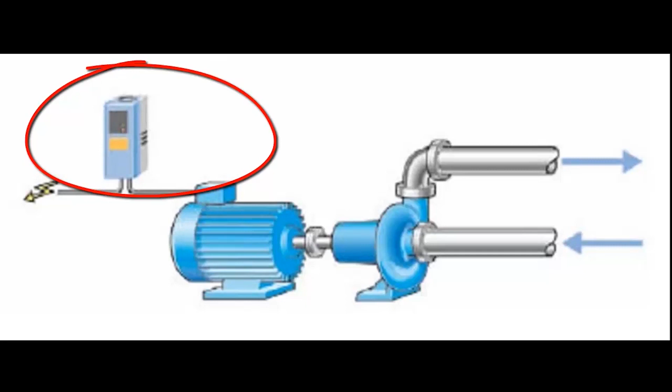Electrical engineers think reducing the speed of a pump will save energy. Mechanical engineers think restricting the flow will make a pump work harder. Neither of these things is true.

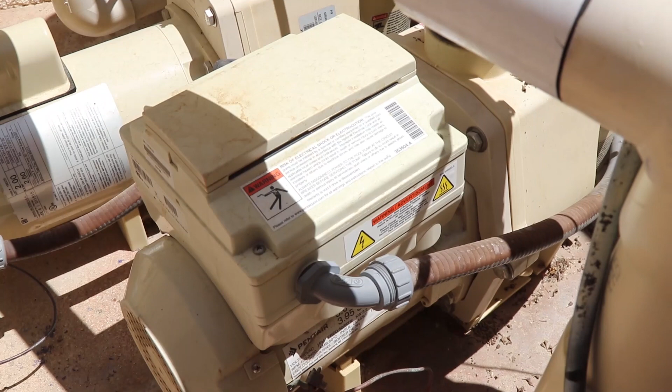Variable speed pool pumps have been available in the open market now for decades. They've risen in popularity in the pool industry in the last several years, being pushed by all the major manufacturers as well as utility companies. They're claiming massive cost savings, reduction in energy usage, all for a reduced price. They're offering massive rebates, $1,000 and more, in order to push this product on consumers and see more of this out in the field.

What I have seen is a rash of green pools, unhealthy looking water, all as a result of variable speed pool pumps running at a lower RPM, which equals reduced circulation and water filtration. I have been of the opinion now for a long time that variable speed pool pumps are not the correct application for a pool circulation pump.

I personally run my variable speed pool pumps out in the field just like a single speed pump. That means I dial it all the way up to full speed, 3,450 RPM, and I will typically run it for a full run cycle, 6 to 8 hours per day while the sun is shining on the water.

Now, what they are trying to get us to believe is that by operating a pump at a lower speed for a considerably longer period of time, that is now translating into the same filtration and water turnover, however, at a reduced cost and energy consumption.

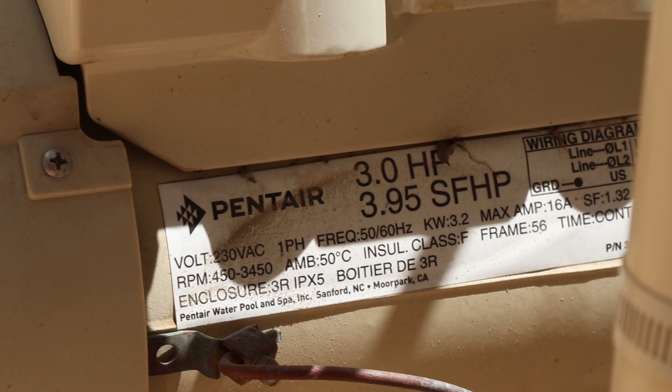Now, to many of my contractor friends and some electrical engineer friends of mine, this all sounds very fishy. These variable speed pool pumps are outfitted with a huge motor, a 3 horsepower motor. So a 3 horsepower motor being run at a lower speed over an extended period of time, in my head, translates to the same or more energy consumption.

Now, you take this back to the manufacturers and the utility companies, and you can see why they might be really pushing this product on us, telling us that it's saving money. Why? Because it's selling more product for the pool manufacturers, and it's selling more energy for the utility companies. There's $27 billion worth of variable speed drives sold every year.

For example, if they wanted this to truly be an energy saver, why did they not build these pumps with a 1 horse motor or a 3/4 horse motor? Yeah, that was exactly what they did with the pool industry. They outfitted these variable speed pumps with the highest available horsepower motor, a 3 horsepower motor. And if they were interested in the electrical savings, why didn't they not outfit them with a 1 horse or 1.5 horse? They went straight to the 3 horsepower because that's going to gobble up the maximum amount of electricity.

Well, not so much that, but you have to oversize a pump with a VFD because of the affinity law. The second part of the affinity law says you lose head by the square of the speed. So a flat curve, centrifugal, single impeller pump like a pool pump, you can't slow it down but about 5%, or you don't have the 30 pounds of pressure you need for the filter to work anymore.

So they start out with a 3 horse pump that will build 60 pounds of pressure, so they can slow it down about 20% and still have the 30 pounds of pressure you need. But if you start out with anywhere close to the right size pump, you can't slow it down or it won't do what it's supposed to do because it's running at its best efficiency point, giving you the most gallons per kilowatt that you can possibly get because you're not restricting it or slowing it down.

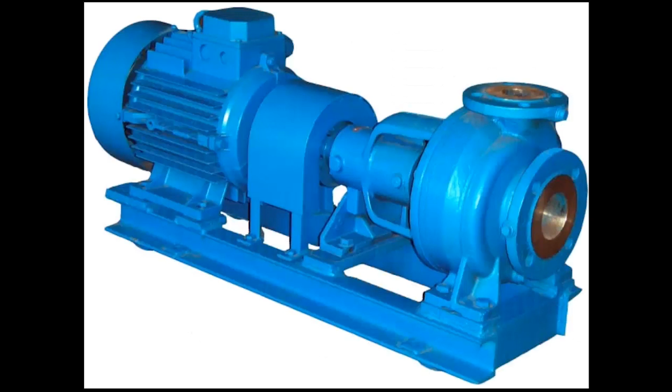The curved vane centrifugal pump, most commonly used today, was invented in 1851. Nothing uses less energy than a normal centrifugal pump running at full speed and operating at its best efficiency point. Many people have tried, but no one has been able to improve upon this centuries-old design. So nothing uses less energy than a single speed pump at its best efficiency point.

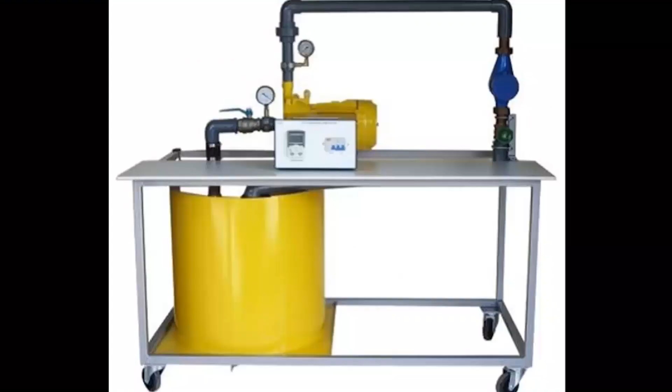So to understand a single speed pump and its best efficiency point, we also must understand how to read a pump curve. When a pump is built, it is put into a test pit and run through its paces. The performance of the pump is plotted from 0 to max flow rate. Connecting the dots produces a pump curve. Guesswork, fuzzy math, and personal opinions don't apply. The pump curve shows you exactly what the pump will do.

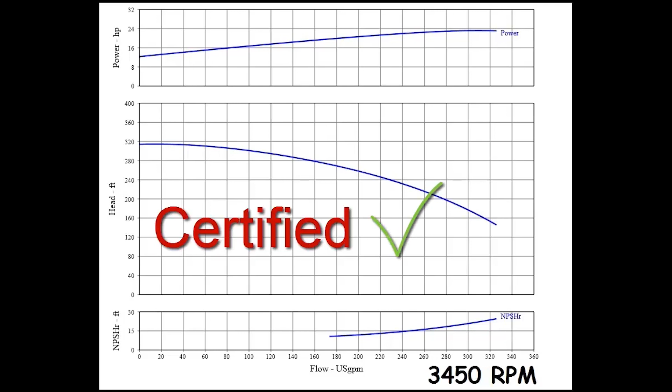Manufacturers can supply a certified test, and you can even witness the test on video. Guesswork, fuzzy math, and personal opinions do not apply. So this is what we call a hard science. A soft science is something that changes, like the weather. The weather is a soft science, okay.

What Cary Austin is presenting to us, this is a hard science. This cannot be argued. He's going to prove to us that variable speed pumps are a hoax, actually costing us more money over the lifetime of the pump.

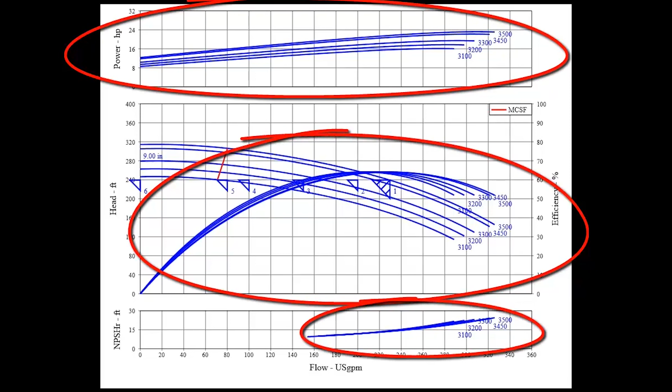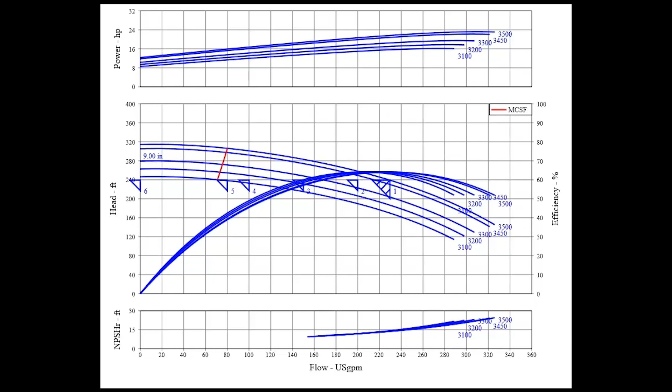Pump curves can show the horsepower, the efficiency, and the net positive suction head required. It can also have multiple performance curves depicting different impeller diameters and/or multiple pump speeds. Don't let any of this confuse you. Most pump companies' electronic catalog will let you X out the parts you don't need to see.

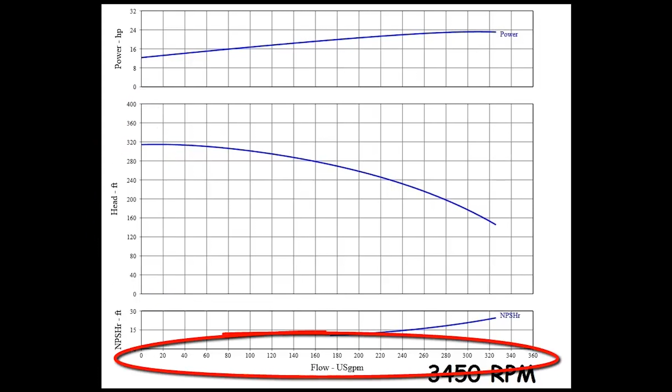In most cases, we only need to look at the performance and horsepower curve for a single speed pump with a set impeller diameter. Lift in feet of head is on the left side of the performance curve. The flow rate in gallons per minute is on the bottom of the performance curve. The horsepower curve shows how much energy is used at all different operating points.

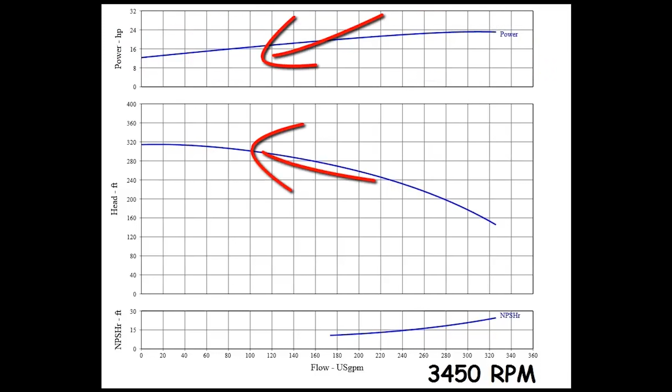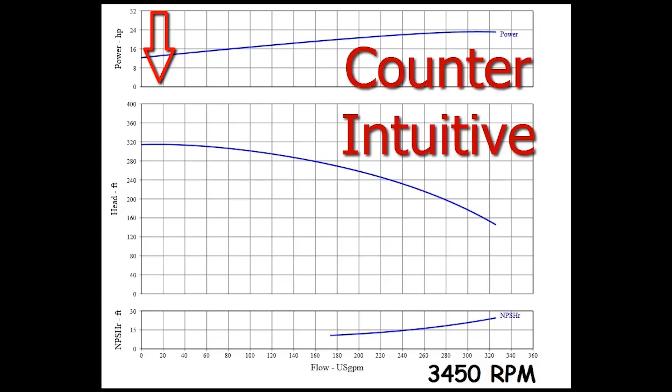Notice how the horsepower goes down as the lift or pressure goes up. It is completely counterintuitive, but restricting the flow of a pump reduces the horsepower or energy used and makes the pump work easier, not harder. As you can see, the horsepower for this pump naturally drops by 50%, from 24 horsepower at 300 gallons per minute to just 12 horsepower at 10 gallons per minute, without varying the speed of the pump.

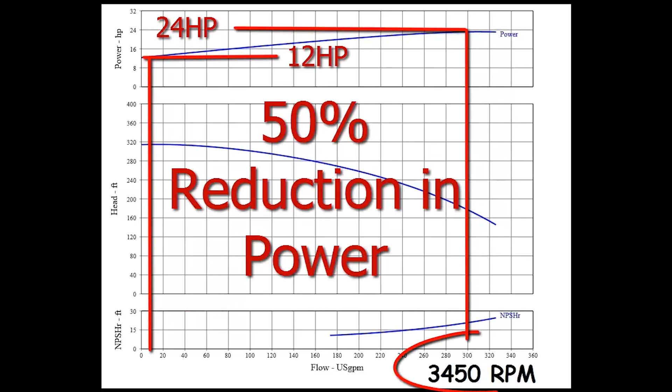Okay, this is very important. The horsepower organically reduces as the pressure on the pump increases, which means the electrical draw on the amps automatically reduces as the back pressure on the pump increases.

To a pump, 1 pound of pressure is the same as 2.31 feet of lift. So to get 50 psi at the faucets, the pump must produce 50 times 2.31, or 115 feet of lift. That 115 feet of lift for the pressure must be added to the actual pumping depth to water in the well.

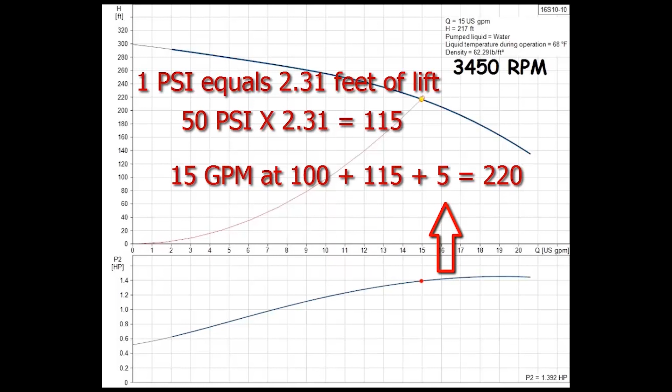If the pumping water level in the well is 100 feet and there is 5 feet of friction losses in the pipe, the pump must be able to produce 15 gallons per minute from 100 foot depth, plus 115 feet, which is the 50 pounds pressure needed, plus 5 foot of friction loss, for a total dynamic head of 220 feet. We look for a pump with a performance curve that intersects at 220 feet of head and 15 gallons per minute. This regular submersible pump, which spins at a constant 3450 RPM, fits the requirements.

So what Kerry's explaining here is he has not actually messed with the running speed of the pump. The pump is still spinning at 3,450 RPM. However, he's demonstrating that by increasing the pressure on the pump, it is drawing less electricity. It's having to work less. With this electronic curve, selecting the operating point of 220 feet and 15 gallons a minute will put a corresponding point on the horsepower curve.

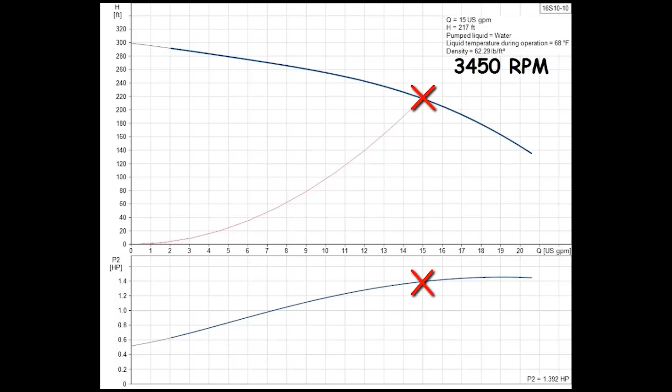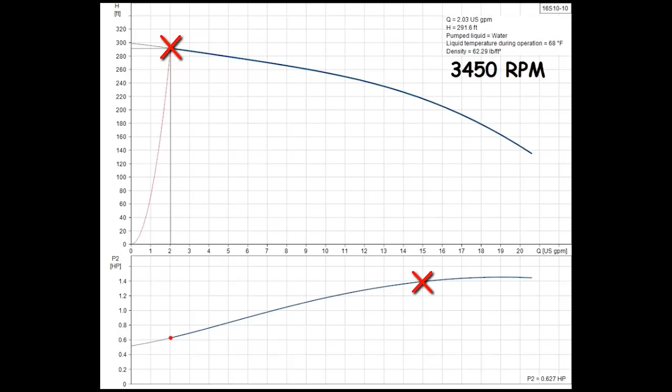You can see this pump will use 1.392 horsepower at 15 gallon per minute flow. Putting another operating point at 2 gallon per minute flow shows the horsepower required decreases from 1.392 at 15 gallons per minute to 0.627 horsepower when the flow rate is restricted to 2 gallons per minute.

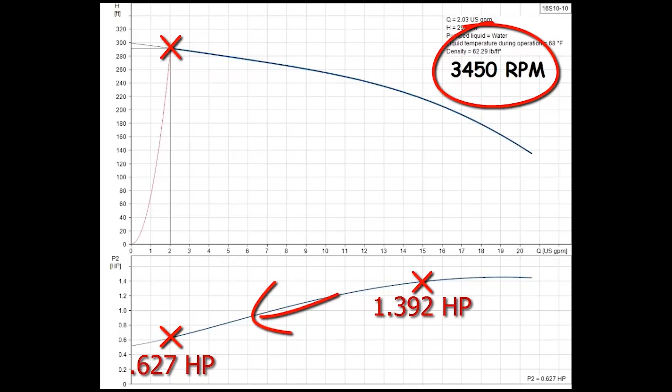That's right. The pump speed or RPM stays at the normal 3450 RPM while the energy consumption drops by 55% when simply restricting the flow with a valve.

Now, I know the argument everybody's going to write in with and tell me that, Mike, this is not a pool application. However, the science is still the same. Cary is still dealing with centrifugal pumps. He's still dealing with pumps that have a motor, an impeller, a diffuser, a seal plate, mechanical seal, all the same stuff that our pool pumps also deal with. He's just dealing with it in a larger scale because he's dealing with well water extraction in Texas.

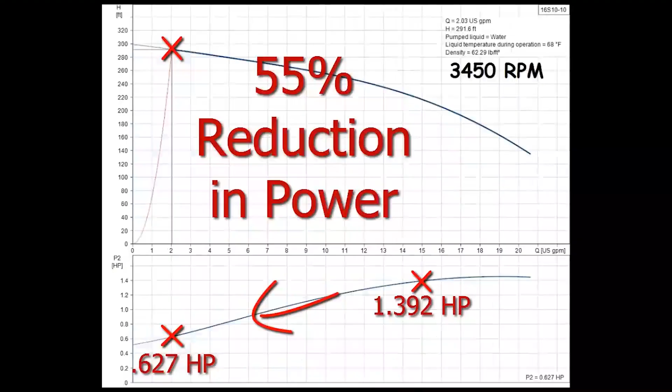Now let's look at a variable speed pump curve for the same application. Also known as variable speed drives, variable frequency drives, or just VFDs, the area shaded in blue is the supposed working area for this pump at varying speeds. Many engineers preach about the affinity law. They make a big deal about how horsepower is reduced by the cube of the speed, which shows a 50% reduction in speed will cause almost a 90% reduction in energy use.

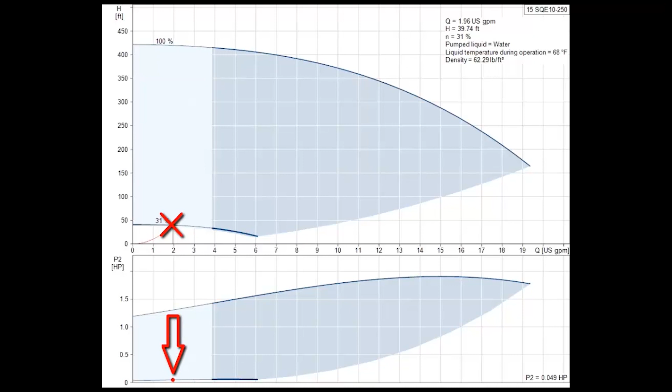With this electronic pump curve, there are lines marked all the way down to 30% pump speed. If you place a point at 30% speed and 2 gallons per minute, it will show the horsepower will drop all the way down to 0.049 of a horsepower.

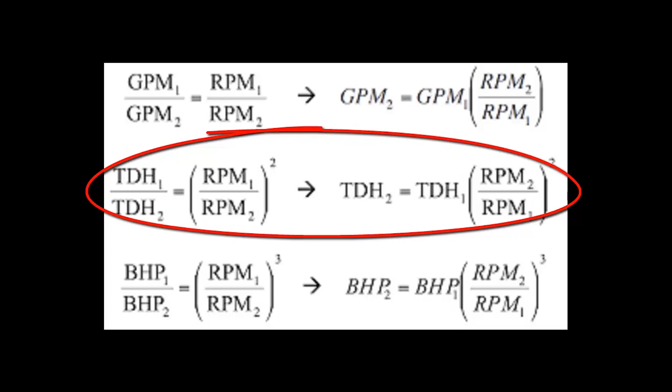That's impressive, right? However, the most important part of the affinity law, which many engineers conveniently try to forget, is that head or pressure is lost by the square of the speed. At 31% speed, this pump can't even lift water out of the well, much less build the 50 pounds of pressure needed. So that actually doesn't matter if you have a 3-horse pump, a 20-horse pump, it doesn't matter if you're asking the pump to move 2 gallons a minute. In this case, it's using 0.049 horsepower.

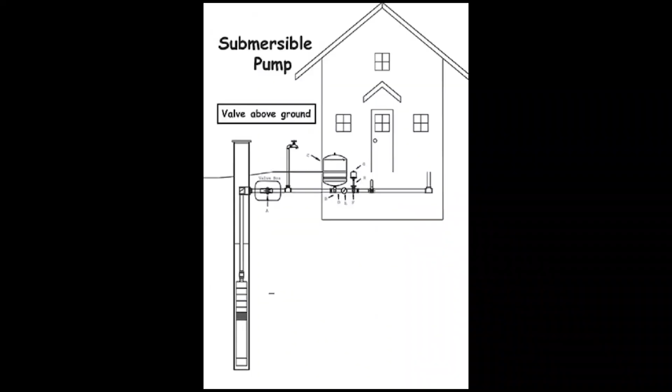This is fascinating what he's about to tell us right here. This is where the variable speed pump savings idea, that argument, falls completely apart in my opinion. The pumping level of the well will always be at 100 feet, and the system will always need 50 psi. So the pump must always deliver at least 220 feet of total head. The most this pump can be slowed down and still produce the 220 feet of head needed is only 20%, not 70% as many falsely believe.

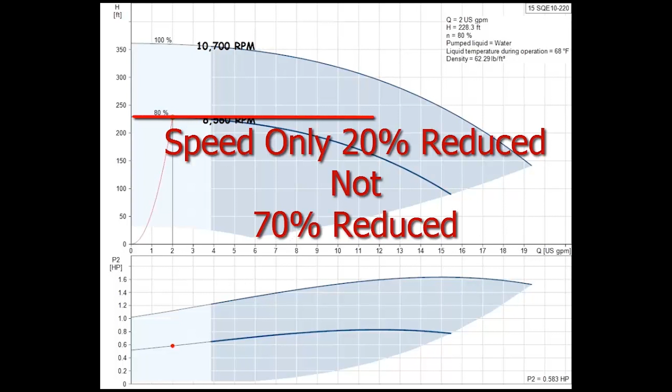Anything lower than 80% of full speed will not lift water out of the well or produce pressure to the faucets. And since 80% of full speed is the slowest speed possible, reducing energy consumption by the cube of the speed doesn't add up to much. So our translation for swimming pools, comparing it to his well water usage, is we need circulation. We need XYZ gallons of turnover per day multiplied by XYZ gallons a minute, and this is going to produce XYZ healthy looking pool or not healthy looking pool.

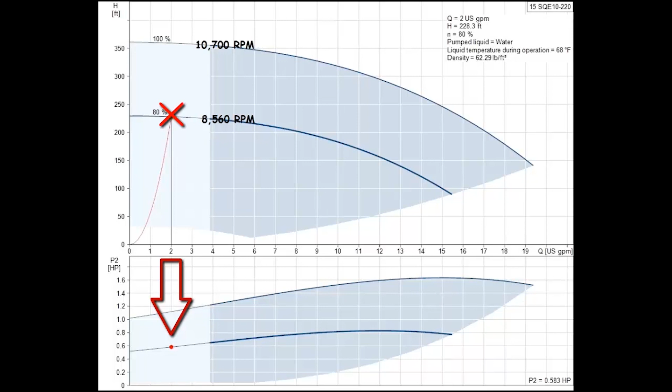As you can see, placing a point at 220 feet of head and 2 gallon per minute flow shows the pump can only be slowed by 20%. This requires 0.583 horsepower, which is 92% more energy than the 0.049 horsepower many would like for you to believe. There it is, folks.

Very fascinating. So to do the same work, to move the same 2 gallons that he is using in this example, with a pump running at a slower speed, the variable speed pump is working 92% harder. And that's just this example.

My phone call with Cary later that day, his opinion is that variable speed pumps are costing between 500% and 700% more over the lifetime use of the pump. I saw in your video, in your example, it went up almost 300%. Yeah, and that's a low case. Most of them are 500, 700%, depending on the actual pump.

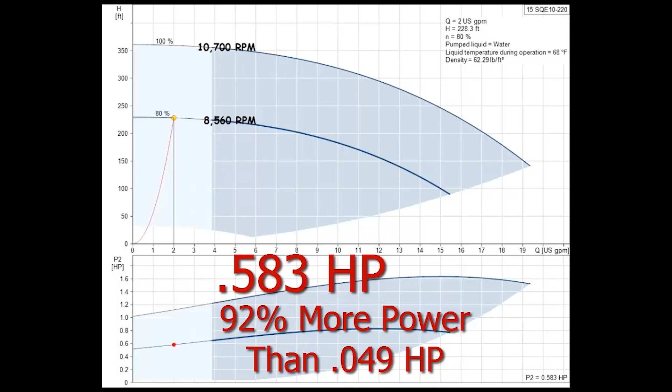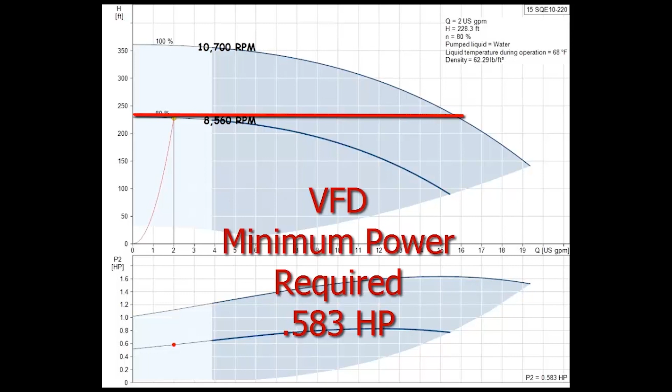The pump must always maintain 230 feet of head, so none of the shaded area below the red line is usable. Since 0.583 horsepower is the least energy use possible with a variable speed pump, there is only a 7% difference from the 0.627 horsepower needed by simply restricting a normal full speed pump with a cycle stop valve, or CSV.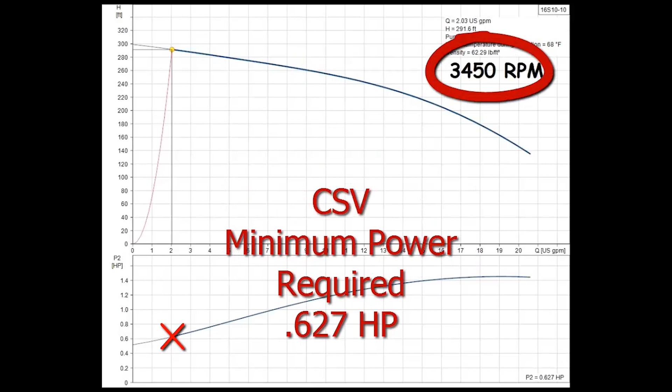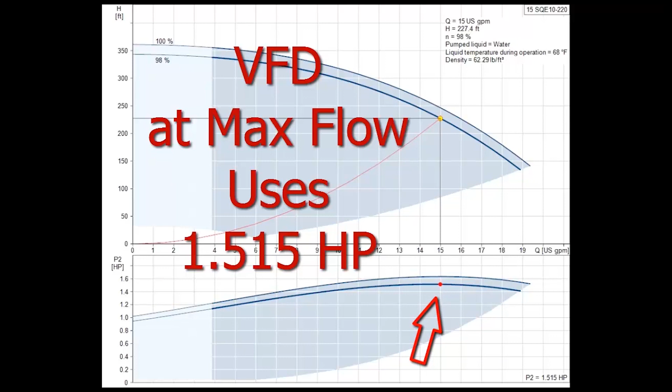Then, when you look at the power needed for the maximum flow rate of 15 gallons per minute, the variable speed pump uses 1.515 horsepower, compared to a normal full-speed pump using only 1.392 horsepower.

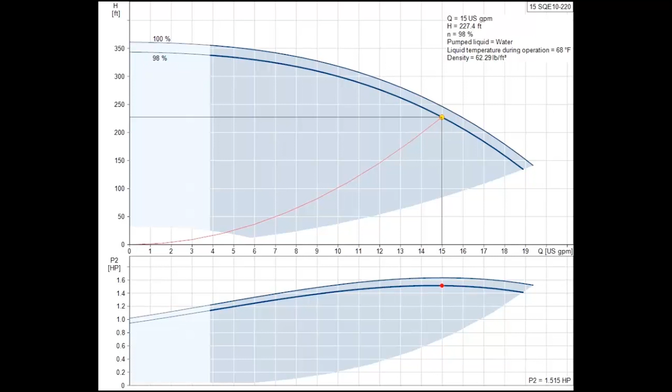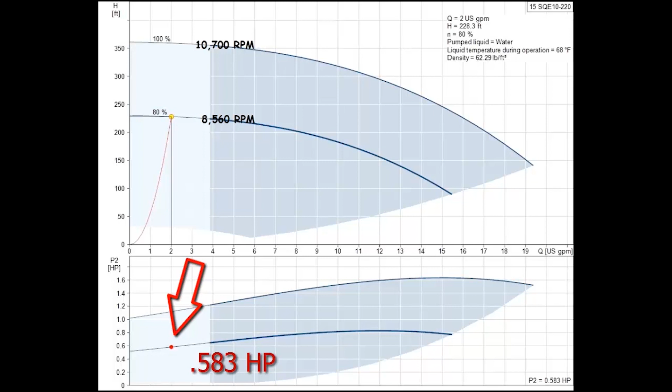In spite of these facts, many people will see the amp meter dropping from 1.515 horsepower at high flow and high RPM to 0.583 at low flow and low RPM and still say, 'Look, the VFD is saving 62% in energy.' But wait a minute, not so fast.

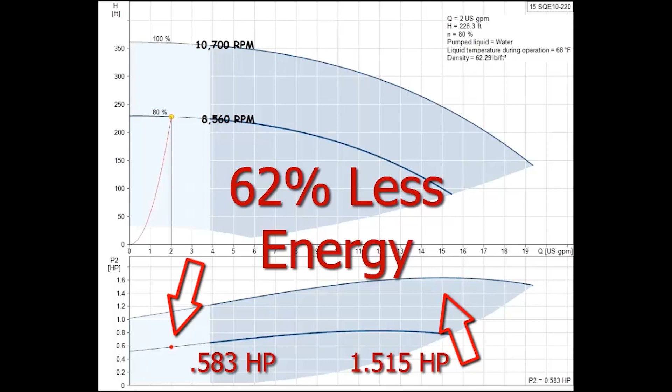Decreasing the speed only reduces the horsepower needed to spin the pump and motor. Varying the speed actually increases the energy consumption per gallon produced.

So what he's saying is to do the same work, to achieve the pressure he needs for his well water clients, or in our case, to achieve blue, healthy looking pool water, is a certain amount of work. For him, that's 50 psi of faucet pressure, and for us in the pool industry, to achieve that blue, healthy looking pool, we are actually paying more using a variable speed pump over a single speed pump.

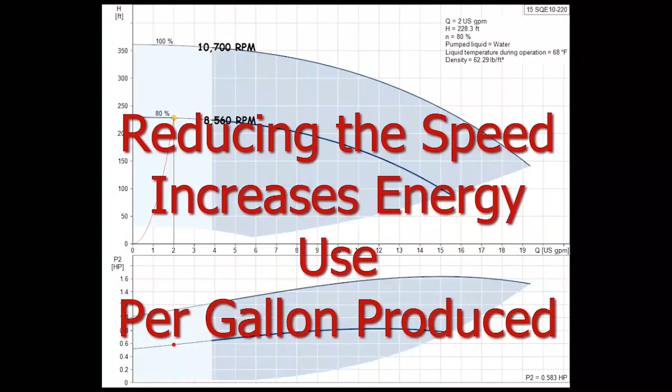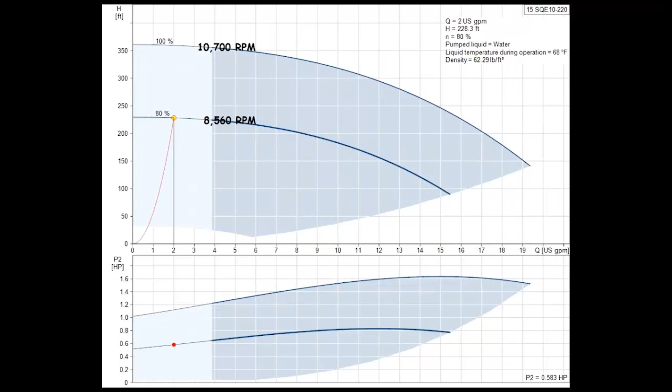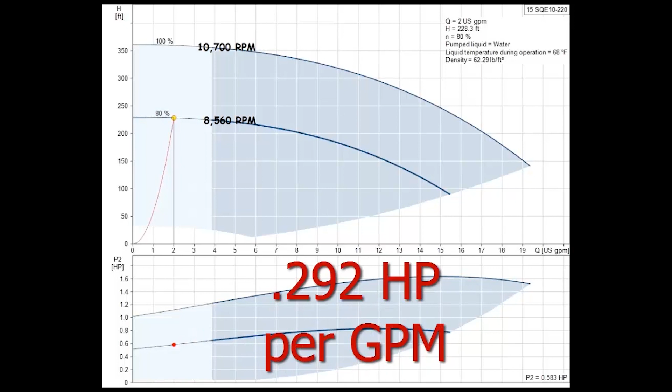Looking again at the maximum flow, producing 15 gallons per minute with 1.515 horsepower uses 0.101 horsepower per gallon per minute produced. This pump, slowed down by 20%, is still using 0.583 horsepower for only 2 gallons per minute flow, which is 0.292 horsepower per gallon per minute produced. That is a 290% increase in energy use at low flow caused by varying the speed with a VFD.

So if you all followed along with that, the slower a variable speed pump is working, the less efficient it's becoming, and to do the same amount of work, it's going to require more runtime and more energy to arrive at the same place as a single speed pump running at full speed when appropriately sized for the application.

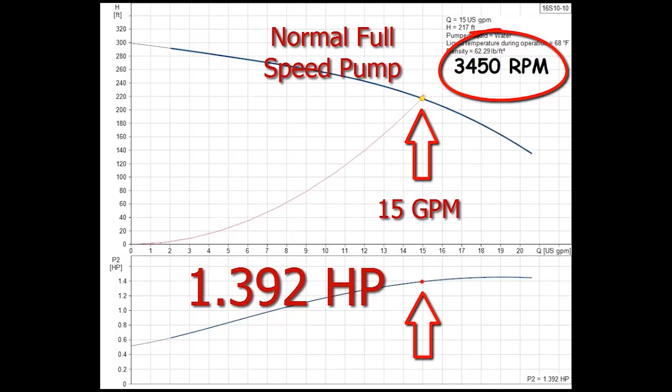Then if you compare a normal full-speed pump producing 15 gallons per minute at 1.392 horsepower to the variable speed pump at 1.515 horsepower, the variable speed pump is using 6% more power per gallon produced at high flow rates. So even at max flow, the variable speed pump is still consuming more and still less efficient.

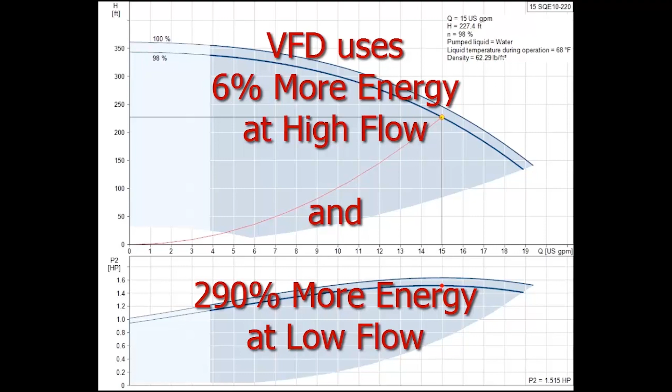Shocking. Even with state-of-the-art technology, permanent magnet motors and all that, variable speed pumps always use more energy per gallon, not less.

Why are so many manufacturers, engineers, utilities, and government agencies still promoting VFDs as energy savers? Pump and VFD manufacturers are raking in profits by letting everyone believe these misconceptions. There's $27 billion worth of variable speed drives sold every year. Ultimately, it is costing consumers and taxpayers way too much.

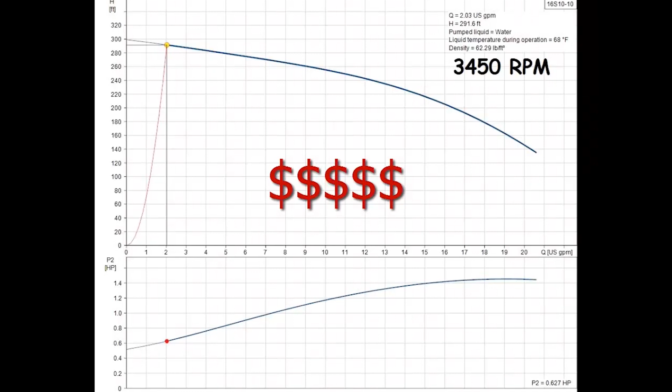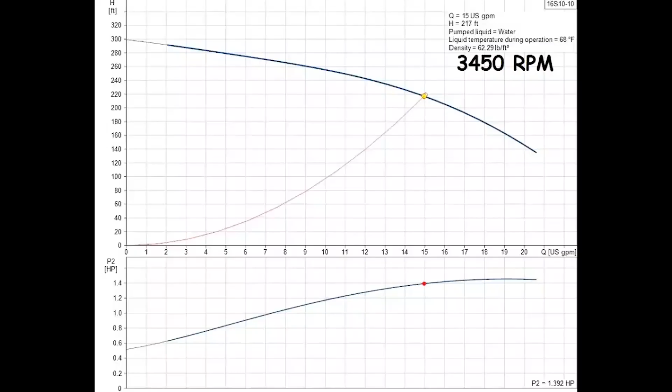Submersible, turbine, centrifugal, jets, and even pool pumps all work the same way. A VFD is just trying to trick a pump into doing something it already does naturally. Learning how to read a pump curve can help save energy, reduce cost, and make your pump system last longer. There is no need for third-party verification, studies by the government, or an accredited university. When you know how to read them, everything can be verified by the pump curve.